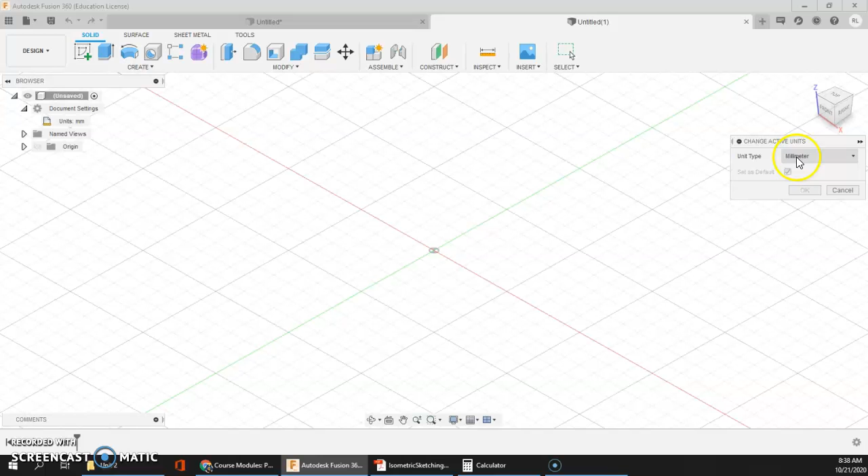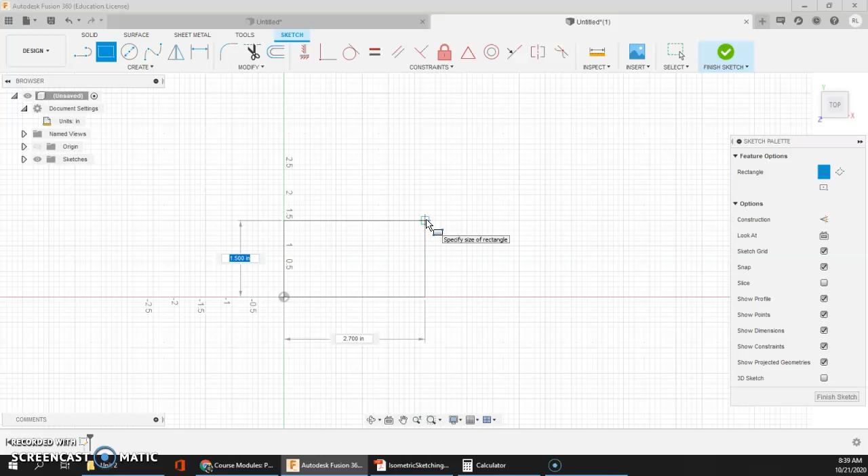So first thing we're going to do is change our units to inches for this model. And basically we're going to sketch an orthographic top view of this object. Okay. And something that is helpful is if you type in your dimensions as you're going, it can definitely speed you up. 1.5, tab key, 2.5. Okay.

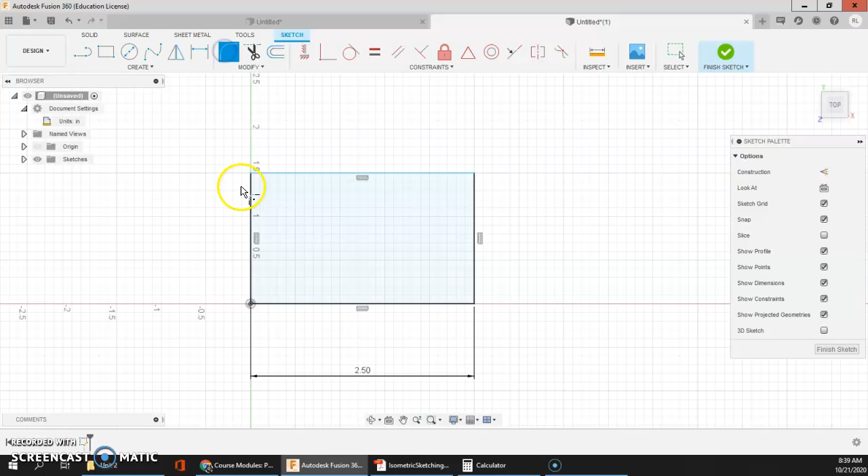And rather than close this sketch and start extruding, I'm just going to go ahead and finish the whole orthographic top view. That way I can basically create my model from one sketch. So we need fillets on these corners. I can select them all at once. Put in my radius, which I've read from the drawing. Okay. Since I already filleted the corners, I can use these center points to put in the holes. 0.25.

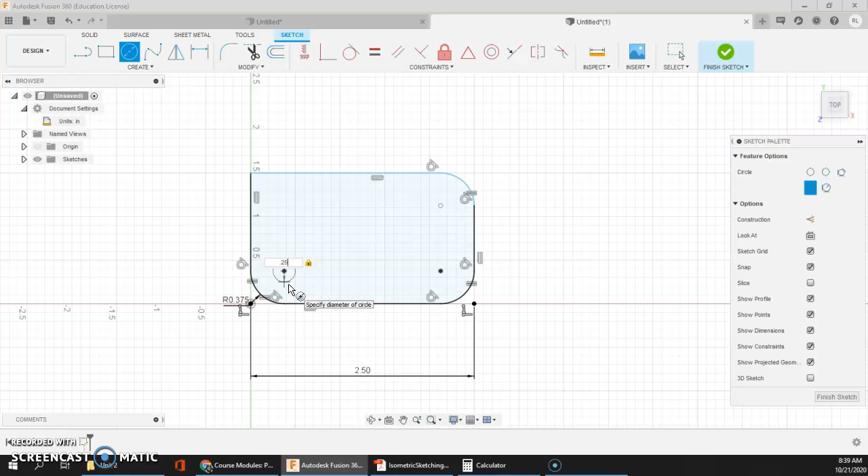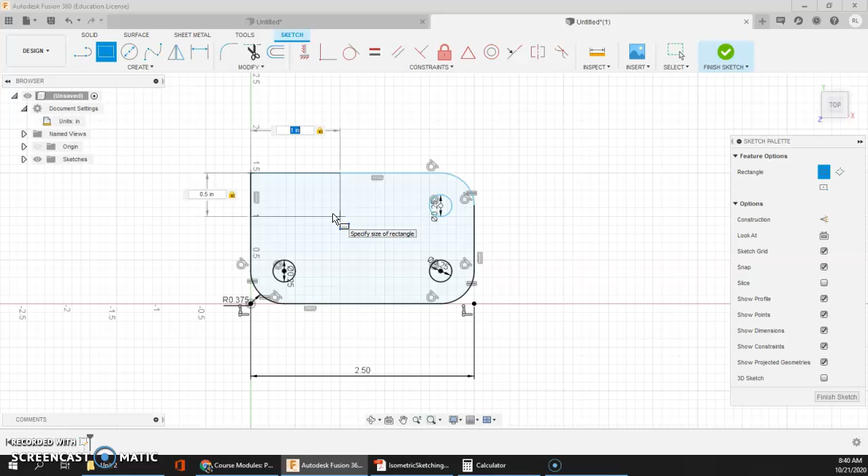Okay. And then if I were looking at this as an orthographic top view, this is how I would see that piece right there. All right, so now I've got everything I need. That's my orthographic top view.

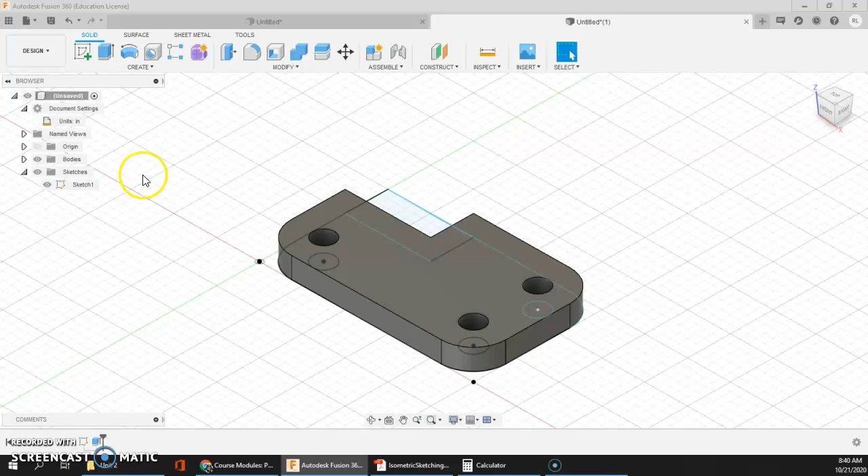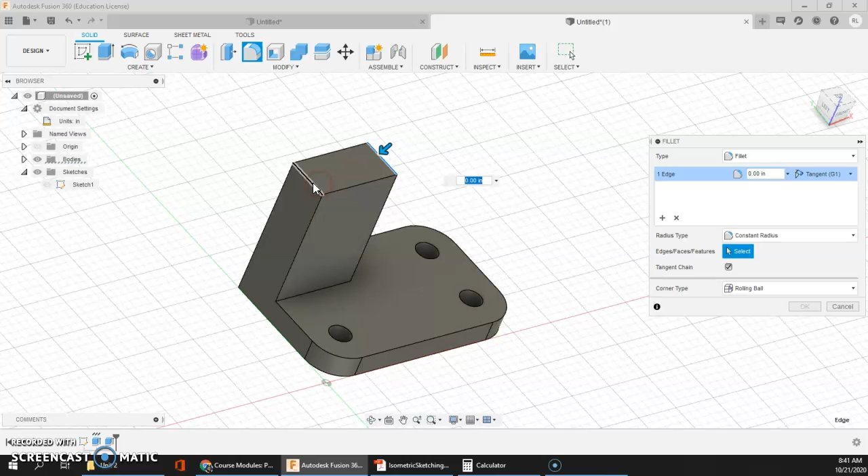So one thing that Fusion is good about that other programs were not as good about is letting you reuse these sketches. I've already extruded it, now I can't see the sketch. But if I click the little eye right here, which used to be a light bulb, now it's an eyeball, I can still see that sketch and I can go back and extrude that other part. And now I've got most of my shape done. So it's a matter of using the fillet command again. Okay.

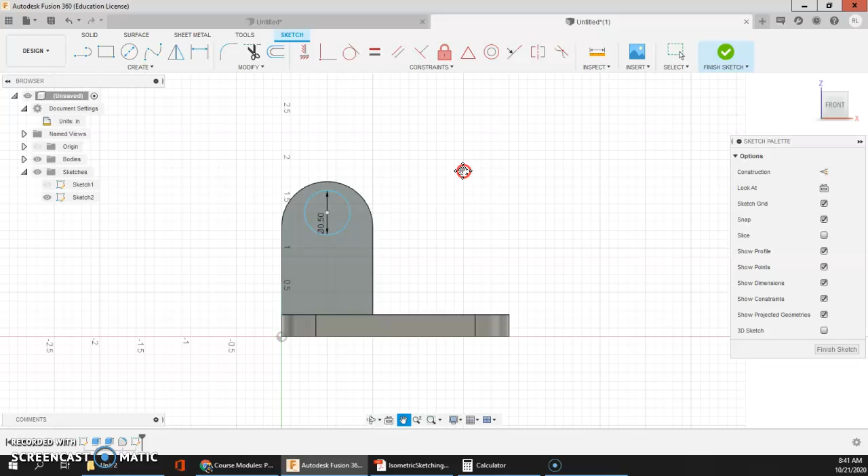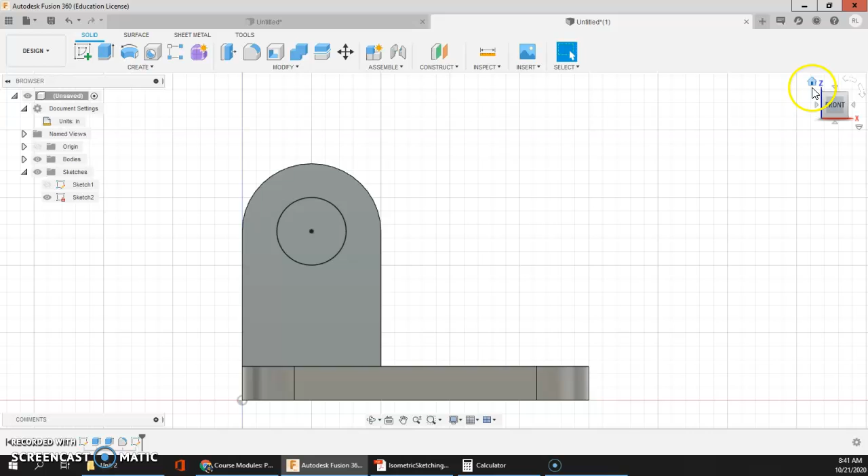And actually, I lied. I actually need two sketches. Need that circle right here, which is 0.5. Okay, and so that circle is not quite lined up. All these constraints up here are geometric constraints that you need to learn how to harness their power because it makes life a lot easier. So I want this circle to be concentric with that arc right there. Easy enough. All done.